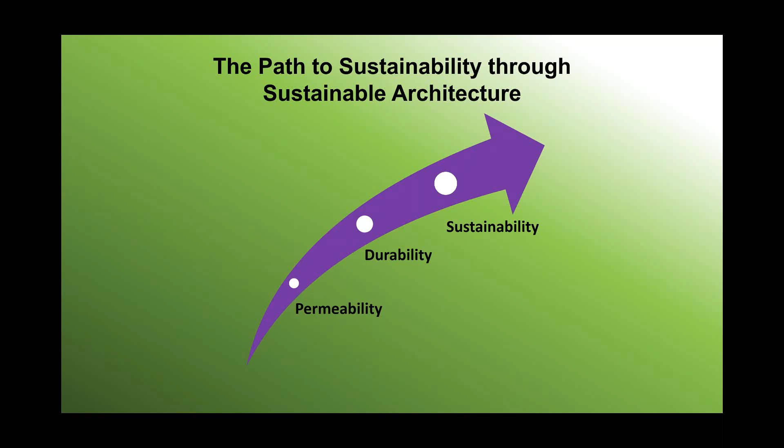...environmental importance and the resulting longevity of structures. So basically, when we increase the service life of any material, we somehow provide a solution for preserving the Earth's natural resources.

But as I mentioned earlier, durability affects all 3 pillars of sustainability, which are environmental, economic, and social. For environmental, durability can reduce the needs for additional materials, energy demands, and waste due to...

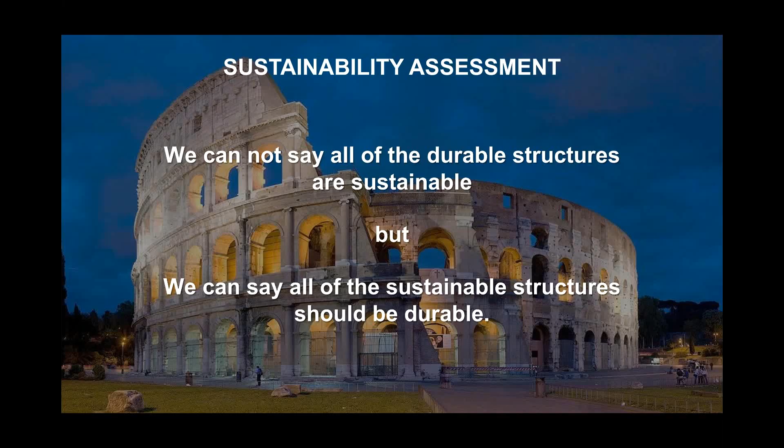So what is the definition of durability? A durable concrete is one that performs satisfactorily in a working environment during its anticipated exposure condition during service. Or in other words, when exposed to its intended service environment, such as a marine site, a durable concrete will retain or remain its original form, quality, and serviceability.

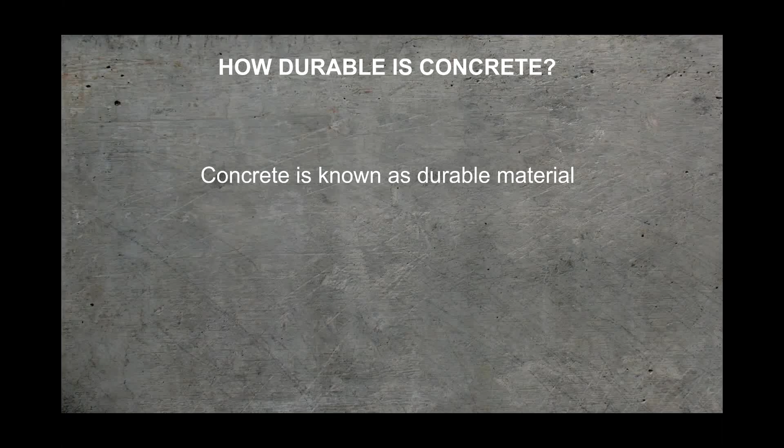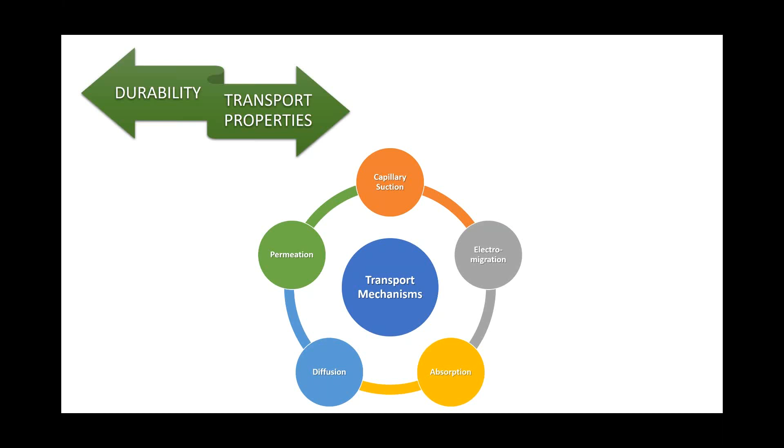So as I quote the definition of durability, the durability of concrete to a large extent is commonly accepted as related to and governed by its resistance to the penetration of aggressive ions such as chloride, through the 5 mechanisms which I mentioned: capillary suction, electromigration, absorption, diffusion, and permeation. These are all 5 transport mechanisms happening through the concrete structure.

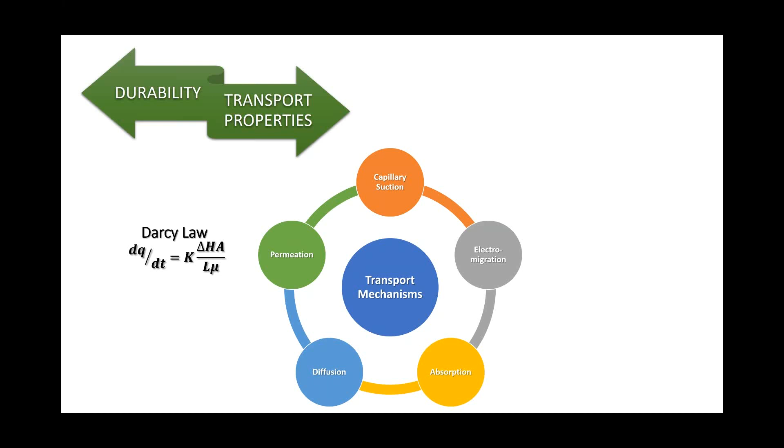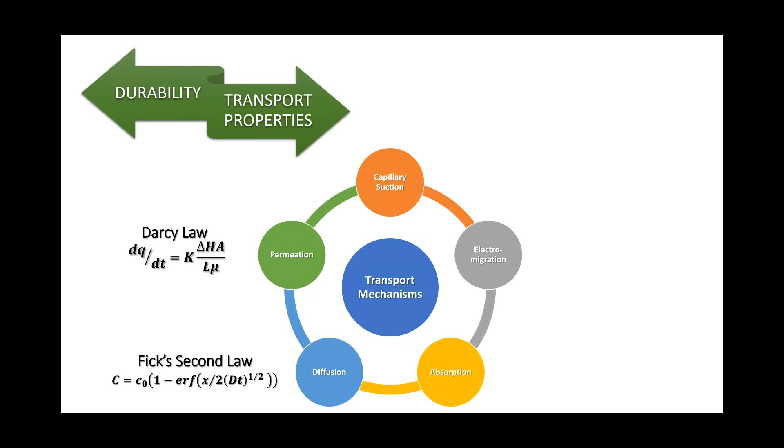So about electromigration, this may be derived from an external source, such as leakage from the direct current power supply, but it is also frequently caused by other factors such as the electrical potential of pitting corrosion of reinforcing steel. Electromigration usually can be measured from the electrical resistance of concrete, because it is the only mechanism by which concrete can conduct electricity.

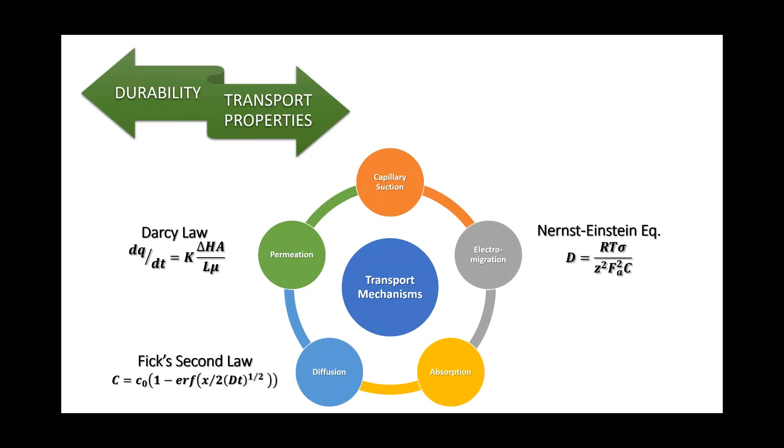We have capillary suction, which is the transport of liquids through a porous solid by way of surface tension acting in the capillary pores. A variety of physical or chemical mechanisms may govern this, depending on the substance flowing, its local concentration, the environmental conditions, or the porous structure of the concrete and the radius and presence of macro cracks.

But the key here, which most researchers and engineers propose, is permeability. It's well known that this is the concept directly related to durability.

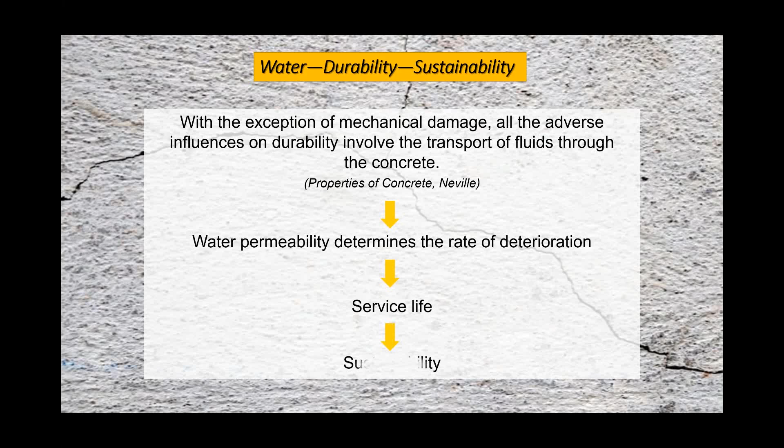So one item is water. As probably all of us know, water is the most harmful agent to any kind of structure, because with the exception of mechanical damage, all the adverse influences on durability involve the transport of fluids through the concrete by water. It can be through solution, or into the air, or other kinds of items. It also controls the rate of deterioration. And when we have a permeable concrete, the service life is going to decrease, and eventually we don't have sustainable structures.

So to clarify, porosity doesn't mean the same thing as permeability of concrete. We can have high porosity and also high permeable concrete. When we have a network of pores inside the concrete which are interconnected, that means we have high porosity and also high permeability, which is going to reduce our durability.

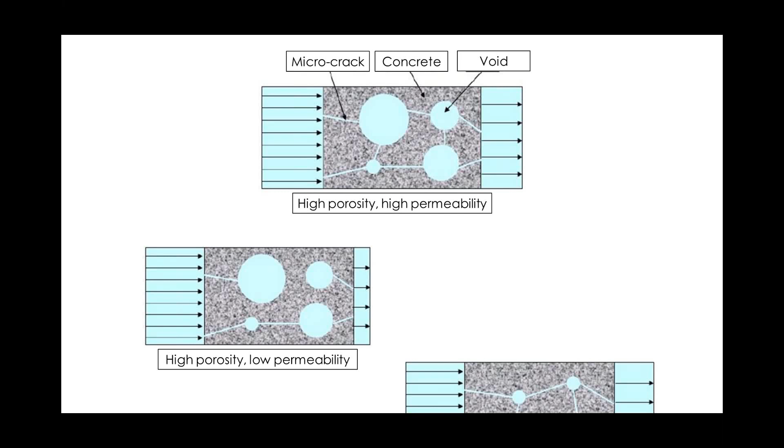As you can see in the photo, we have microcracks, we have voids inside the concrete, and all those voids are internally connected, which tells me this is high porous and high permeable. But in other words, if we have high porosity but these pores are not internally connected, we may have lower permeability, which is kind of an advantage as it's going to increase the durability of our material, concrete. Also, if we have low porosity and the pore size is small, it doesn't mean we don't have permeable concrete, because all these pores can still be connected to each other.

So, what factors affect transport and durability characteristics of concrete? I summarize it in a table such that, as you can see on the left, type and degree of compaction - all these factors can somehow affect the properties of the matrix, which is mostly the porosity, matrix chemistry, and pore fluid chemistry. And all of them are related to all of the transport processes that I mentioned earlier.

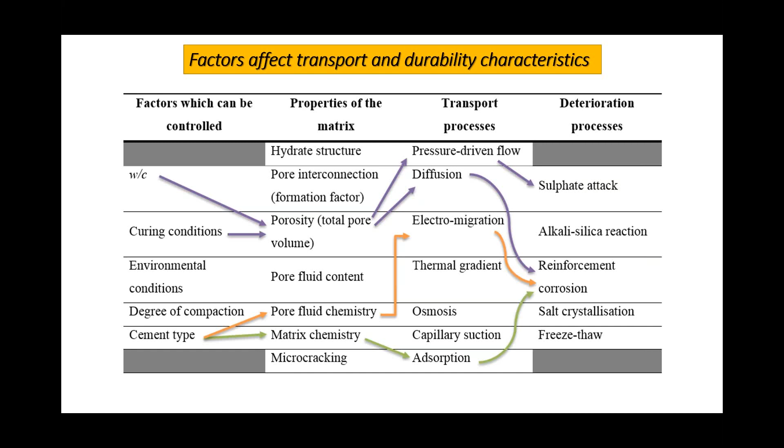So one of them is diffusion, one of them is permeation, the other one is electromigration, adsorption, and so on and so forth. But all of this can create a pathway inside the concrete, and this pathway may end up degrading our material. We also have some deterioration processes inside the concrete, which I mentioned: reinforcement corrosion, which is the major one, and also sulfate attack, alkali silica reaction, and freeze and thaw.

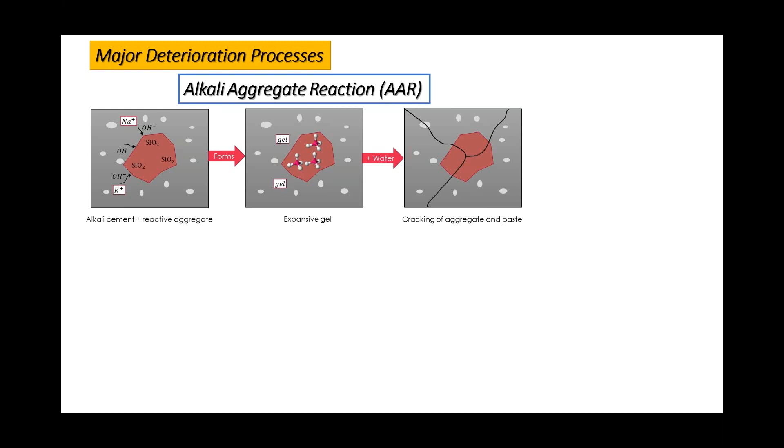But I'm going to quickly go and explain these major deterioration processes inside the concrete. First, I'll start with the alkali aggregate reaction. When aggregates containing certain forms of silica react with alkali hydroxide inside the concrete, they form a gel, and this gel swells as it absorbs water from the surrounding cement paste or the environment. These gels later on can induce enough expansive pressure on our concrete surface, which leads eventually to cracking inside the concrete, which is not a good item at all for durability.

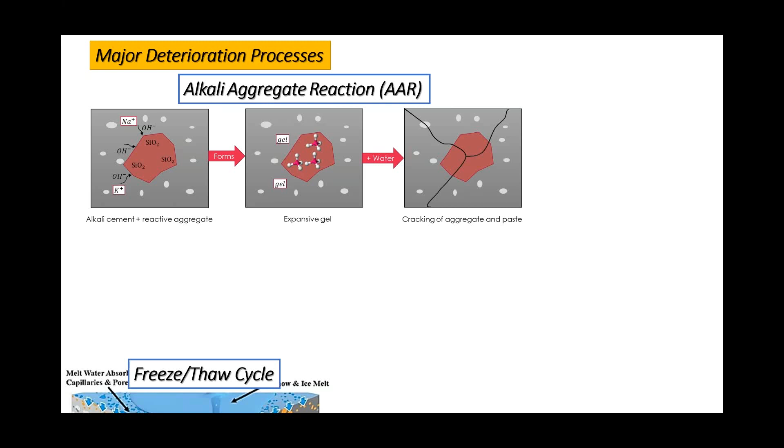Also, another deterioration process is called the freeze and thaw cycle. As we all probably know, freezing of water inside the pores is going to expand by 9% in volume, and that volume of water expansion may cause initial induced cracks inside the concrete. It affects both the hardened cement paste and the aggregate of concrete, and it degrades our material.

These phenomena occur due to the presence of calcium hydroxide in the hydrated Portland cement paste. When the cement paste comes in contact with sulfate ions, the alumina containing hydrates are converted to the high sulfate form, which, as you can see in the photo, is going to form ettringite, which is not a good item for concrete, because eventually the growth of this crystal is going to induce pressure on the concrete surface. These are not stable crystals either, so they may disappear, which is a special case of internal sulfate attack.

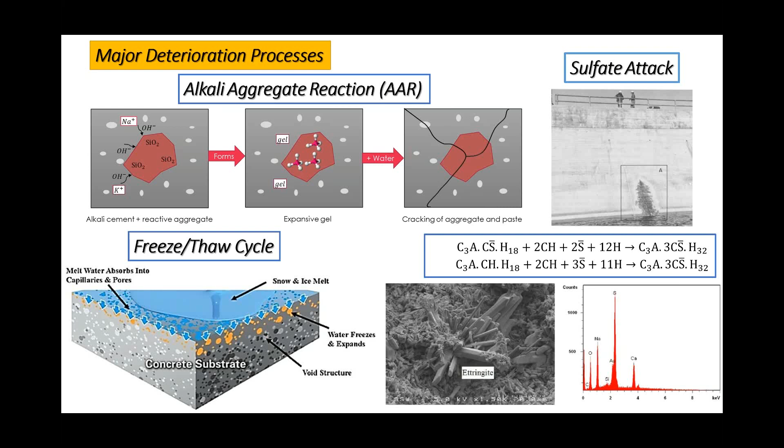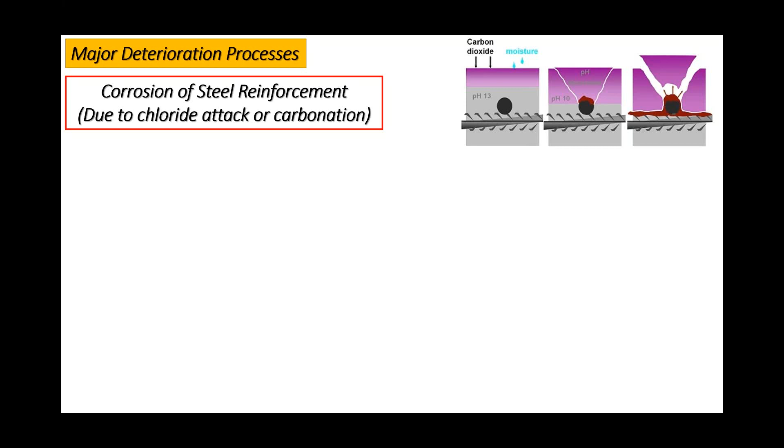But among all of these, based on statistics, it has been indicated that over 40% of failure of a structure is due to corrosion of reinforcement. This is the chemical process to form the corrosion cell, which may be generated in two ways. One way is the composition cell, which may be formed when two dissimilar metals are embedded in concrete, such as steel rebars or aluminum conduit pipes.

Also, in the vicinity of the reinforcing steel, concentration cells may be formed due to differences in the concentration of dissolved ions, such as alkalis or chlorides. So the corrosion is going to happen through chloride attack or carbonation.

When the level of carbon dioxide at the surface reaches the rebar, it's going to reduce the pH level of the concrete, and eventually induce stress onto the concrete surface, tensile strength, and eventually crack the concrete.

Similarly, when we have different oxidation states in the iron, the photo on the right hand side shows the volume expanding by 6 times, which again induces pressure on the concrete wall, and we may have cracks.

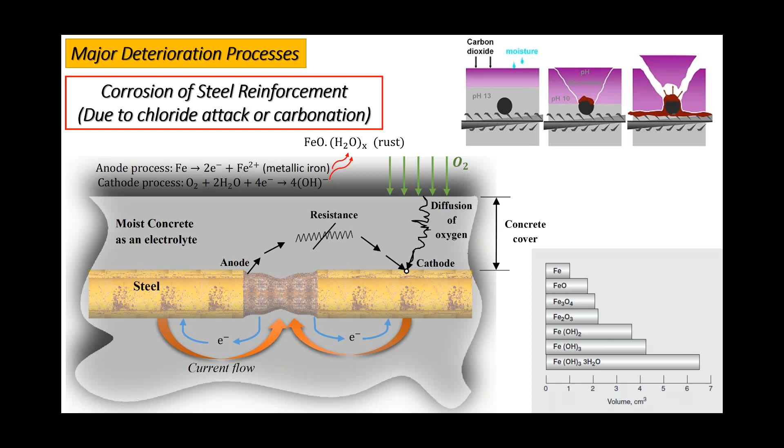Why am I mentioning cracks so many times? We have different types of cracks inside the concrete. Cracks can come before serviceability, or can also be induced after. The crack before happens at the earliest or fresh stage of the concrete, like shrinkage or settlement, or from construction processes such as chemical, physical, thermal, or structural processes.

The cost from this process is around 5 billion dollars. In addition, because of loss in production and traffic jams that occur, indirect costs are also associated with concrete crack repairs.

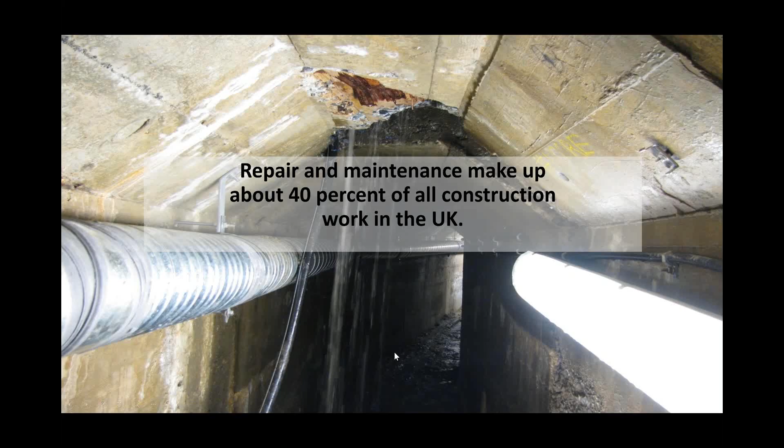Besides all of these repair costs for material, we should consider that sometimes it is not easy or accessible to simply go and repair some structures. As you can see in the photo for underground structures, this is a huge issue because the crack might not be accessible all the time.

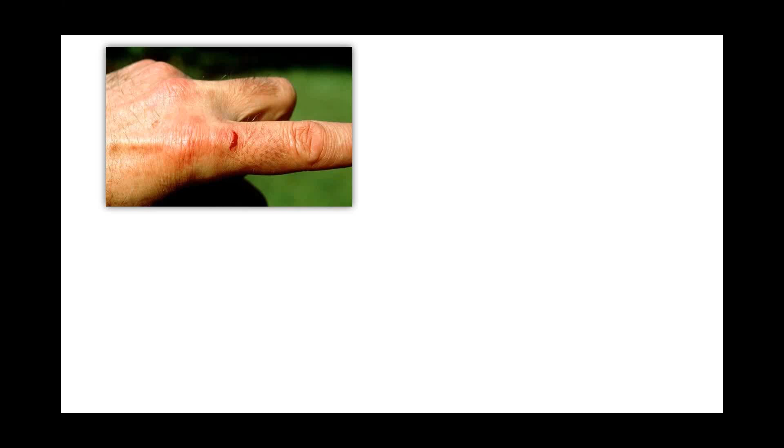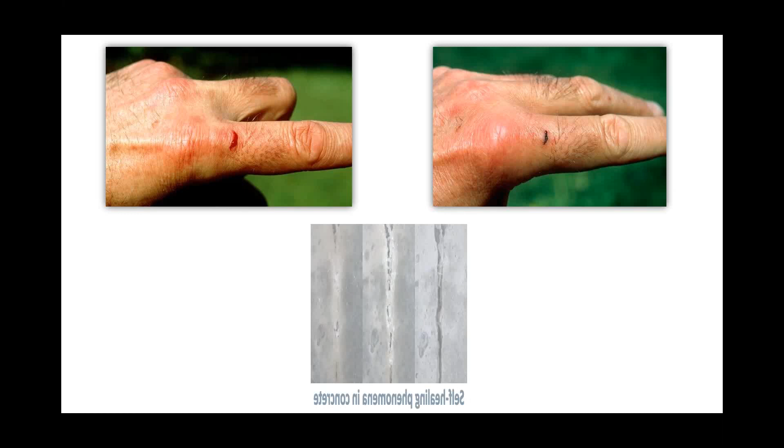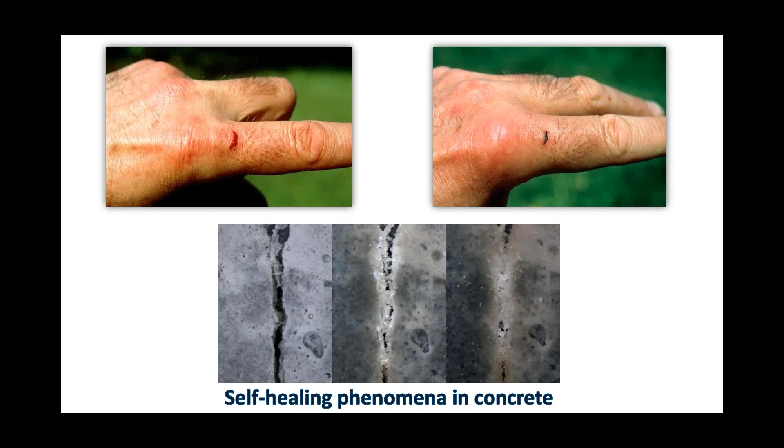But humans always learn from nature. For example, whenever you cut your finger, you can see it start bleeding, but as time passes, the cut in your finger heals—this is similar to what typically happens inside concrete.

But there is an issue—you can't rely on this natural phenomenon because sometimes it might not happen, or it's limited to certain crack widths less than 0.2 millimeters, which isn't much compared to other types of cracks I mentioned.

Recently, there has been great attention to self-healing mechanisms in concrete. It has been divided into two forms: autogenous healing, which I mentioned earlier, and the concept of engineered or autonomous healing, which has been divided into three different ways.

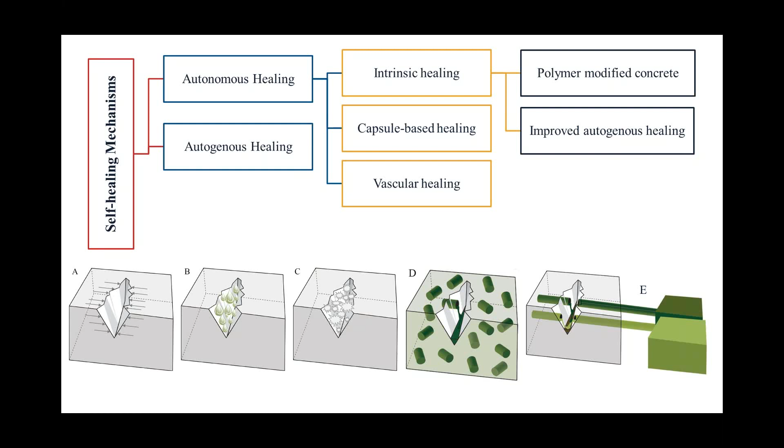But what I'm focusing on now as part of my research is strengthening the hydration products, or providing more crystals that act as a barrier inside the concrete, which helps the concrete improve.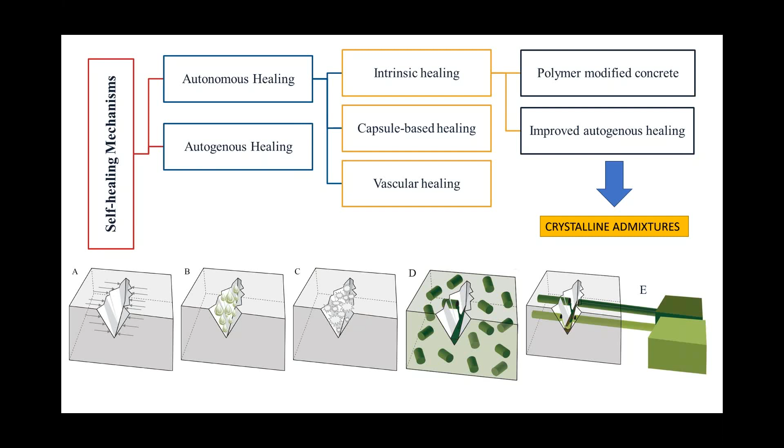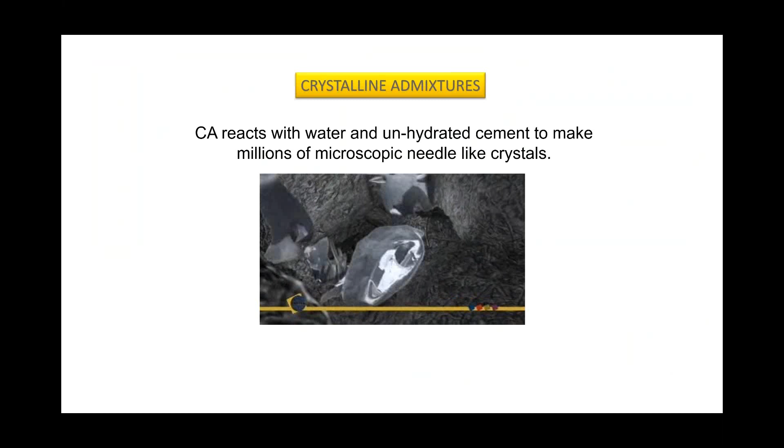So I'm working on a technology called crystalline admixtures. These crystallines are hydrophilic materials with a tendency to react with water and un-hydrated cement, making millions of microscopic needle-shaped crystals, as you can see in the animation.

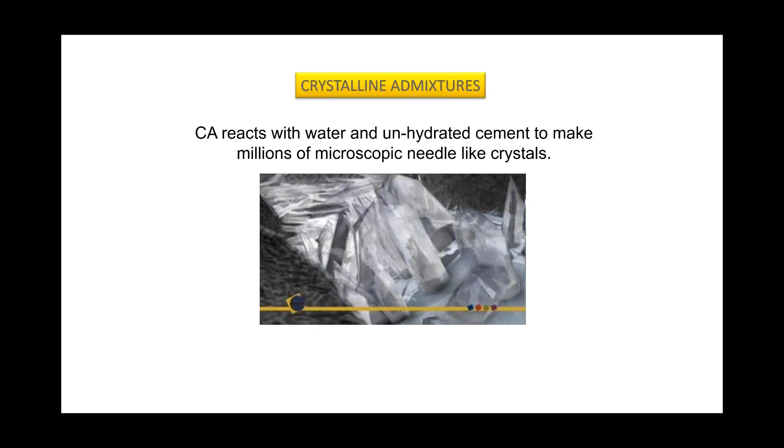This crystal is going to form inside the crack, block the water pathway, and seal the concrete from the outside. This admixture is typically added during construction.

As part of my research, I'm using these kinds of admixtures, but there are still many unknown questions. One is that I couldn't find a research study that evaluates the self-healing capabilities of this admixture using durability, macromechanical, microstructure, and nanostructure tests simultaneously.

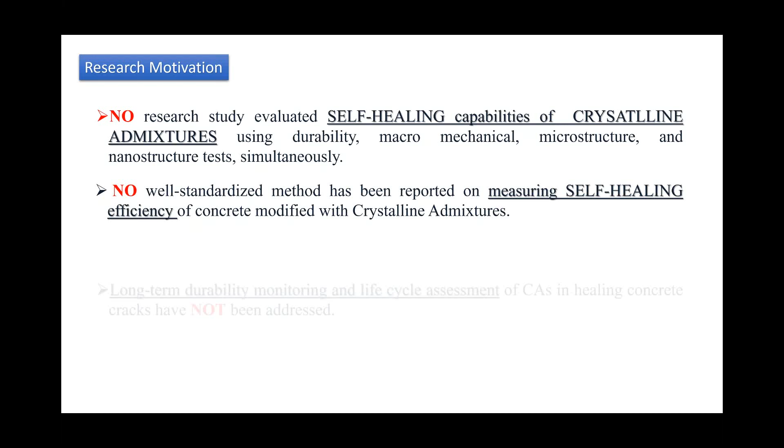Also, I couldn't find any well-standardized method reported on how we can measure the efficiency of concrete when modified with this crystalline admixture. Also, long-term durability monitoring and life cycle assessment of this admixture is somewhat lacking and hasn't been addressed so far.

Also, all the current construction design codes, guidelines, and standards consider concrete as a crack-free material, which is not true at all. Concrete may not be prone to cracking, but there's always cracking inside the concrete.

So we should consider in our guideline the crack phenomena inside the concrete.

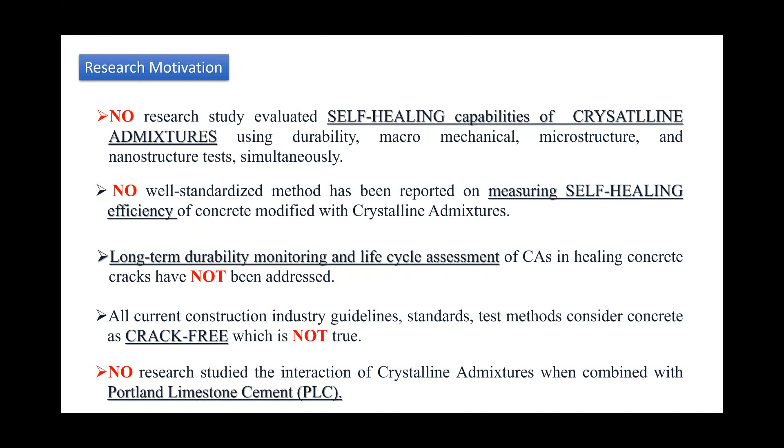No research study I found shows the interaction of crystalline admixture when it's combined with Portland limestone cement. This type of new cement has 15% more limestone, and it has less carbon dioxide footprint, which makes this structure more sustainable because of using less clinker inside.

So I divided my research study into 3 phases. First, I went through the microscopy and wanted to see how these crystalline admixtures perform in microstructures. I also wanted to quantify the reduction in porosity and eventually permeability, and identify the difference between different phases of hydration and chemical composition between samples treated with this admixture or without.

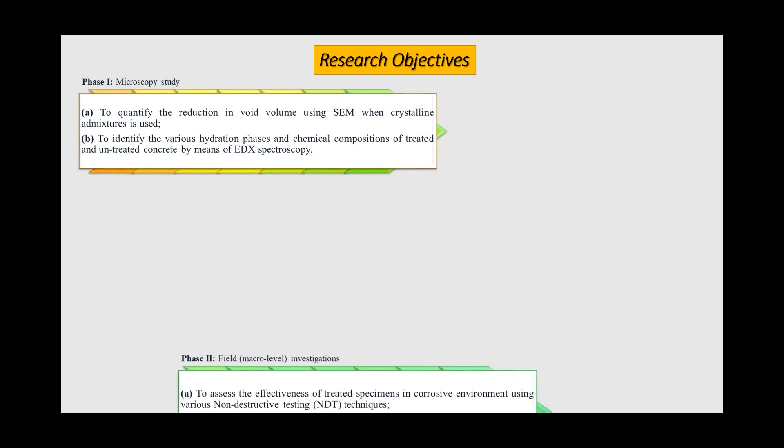I also have some field samples, which I call the macro level investigations, to see the effectiveness and durability of samples in a corrosive environment using various NDT techniques.

And also, I would like to develop a sustainable durability-based design model for my specimen.

At the end, I want to quantify the self-healing capability of this admixture to see its influence when interacting with the Portland limestone cement, and to see various types of environmental exposure and their effect on the self-healing process.

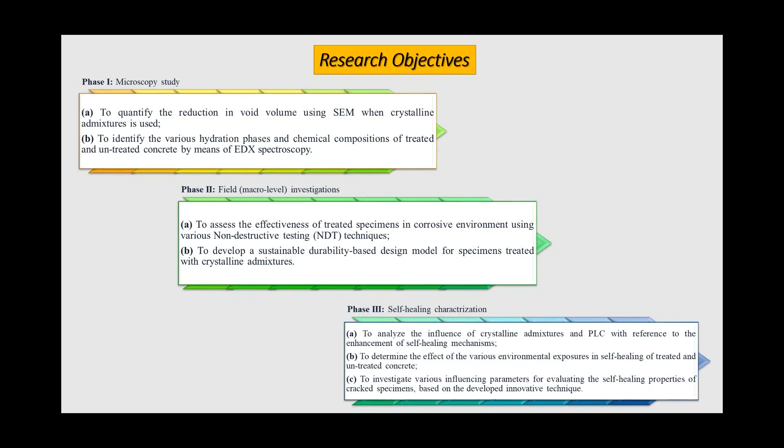So I'll start with phase 1 of my study, the microscopy. First, I used scanning electron microscopy to see the structure and morphology of my samples.

So I cast some mortar, broke them, and coated the fracture surface to see the difference between the control samples, which don't have an admixture. As you can see in the photo, there's a crack inside.

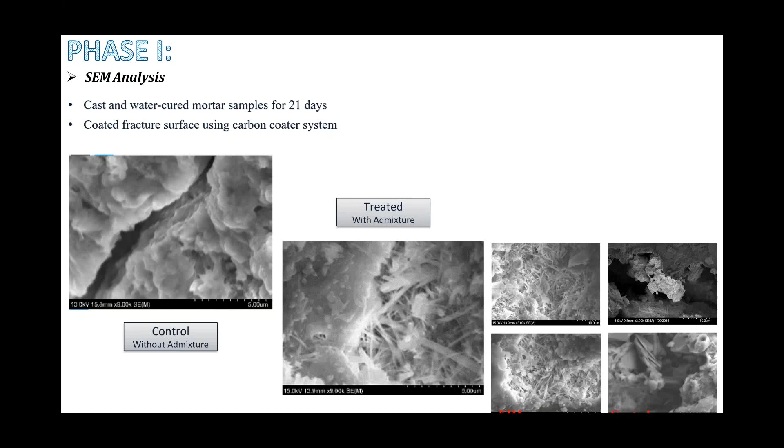I also cast samples where you can see the crystal growth inside the cracks, which gives us an indication that this admixture performs best in crack healing. Here I put some photos comparing the control samples without admixture and the ones with admixture. On the right-hand side you can see the crystal growth inside, and those crystals eventually act as a membrane that blocks the water pathway inside the concrete and makes the concrete heal better.

I went further because of one waterproofing admixture, or crystalline admixtures, so I extended the study to use 4 different types of these admixtures which are commercially available.

As you can see, the KIM product is from Kryton, the international company here in Vancouver, and also 2 different products from one company and another from Penetron. As an indication, all of them showed the growth of crystals inside.

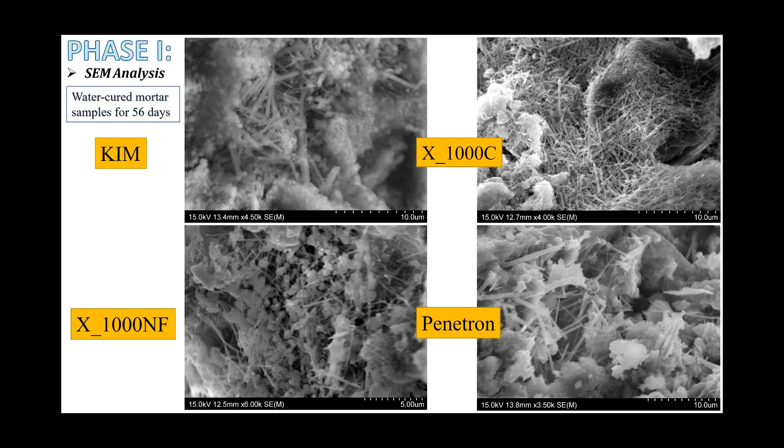In order to identify the difference, I did X-ray analysis on both the product produced by Kryton and the other products. As you can see, when I did the X-ray spectrum analysis, one critical component I needed to look into was whether these crystals were ettringite. As I mentioned earlier, ettringite is not a good thing for concrete.

This can be indicated by the presence of sulfur, and you can simply see here that there's no indication of sulfur and no sulfur peak, which means there's no sign of ettringite. On the side, you can see the elemental mapping for different elements inside the concrete.

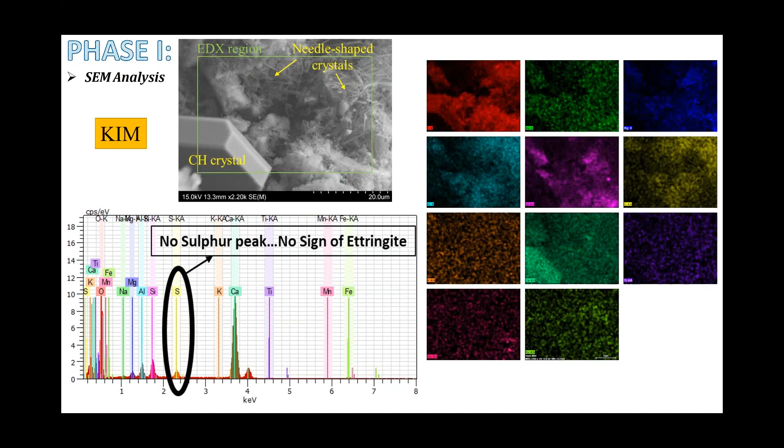Penetron is another product that I used in my research. This also showed crystal growth inside. So as you can see here, I tried to examine it using X-ray analysis, and it turned out differently, because this product seems to also induce ettringite, which, when compared with the other product, is not a good thing for the concrete.

So we need to be cautious whenever we are using this type of crystalline admixture. As you can see here, there's a peak for sulfur, which indicates ettringite inside.

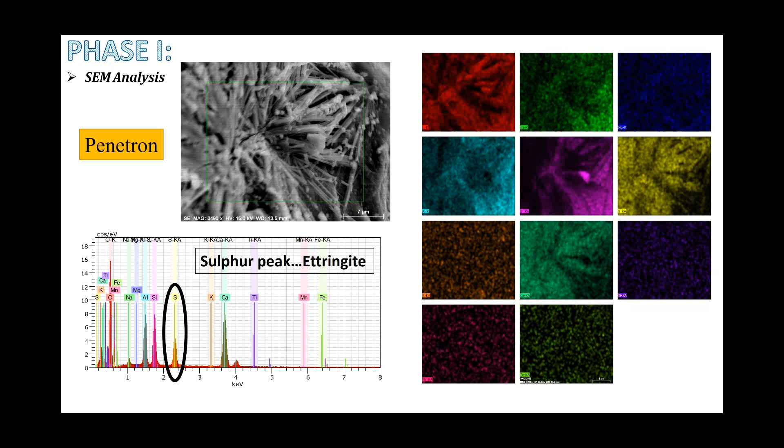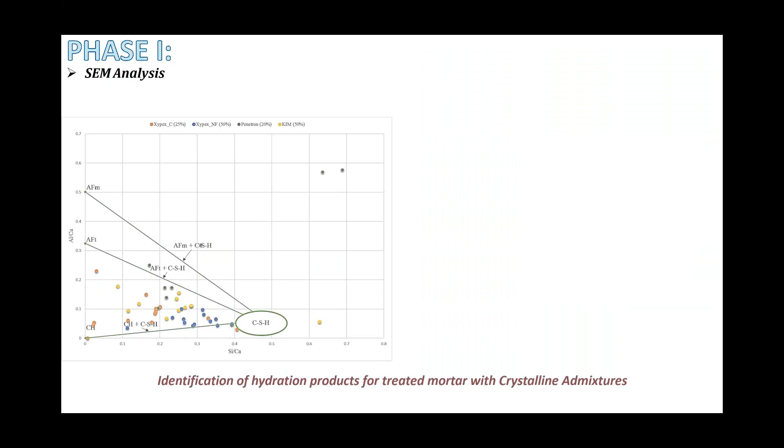And similarly, I plotted the elemental mapping for these products. Also, to find the hydration products, I plotted the aluminum to calcium ratio and also silicon to calcium atomic ratio to identify different hydration phases inside the material.

As you can tell here, it's kind of spread around, but still they are aligning in the line of calcium hydroxide and CSH gel, which is the main product

Also, in our advanced microscopy facility, we are proud of having the highest magnification scanning transmission electron holography microscope, which is one of the tools I used. Using this transmission electron microscopy, I was able to image the nanostructures of these admixtures. So I started with an anhydrous, or unhydrated, particle.

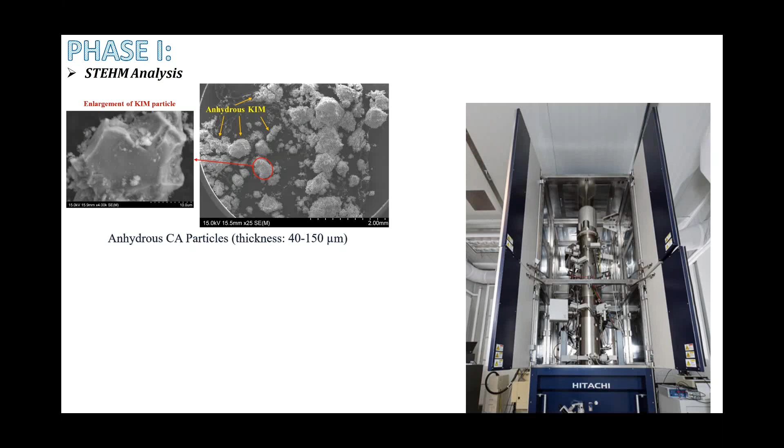I put it under the SEM. The size of this particle was 40 to 150 micrometers. Then I sprayed water on top of my samples, on the powder, and I kept doing that for 7 days. As you can realize, the formation of needle-shaped crystals on the right-hand side of the SEM image is obvious, and all the particles are somehow swelling, with hydration going on inside those particles.

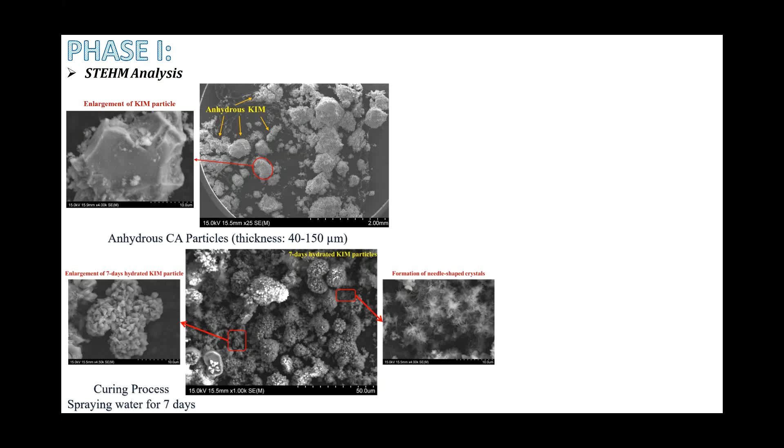But still, as I mentioned earlier, there is an issue when you want to see internal structures of your particles. The sample size that can be fitted inside the TEM should be less than 100 nanometers. To satisfy that purpose, I used the focused ion beam, which is a micro milling machine, and I cut the sample, one particle, to create an electron-transparent sample, as you can see in the photo.

So this is the view from our STEM, and you can simply see the particle has been cut to the degree that we can see through it, electron-transparent. Then I start analyzing that nanoparticle using different techniques. I call it STEHM analysis.

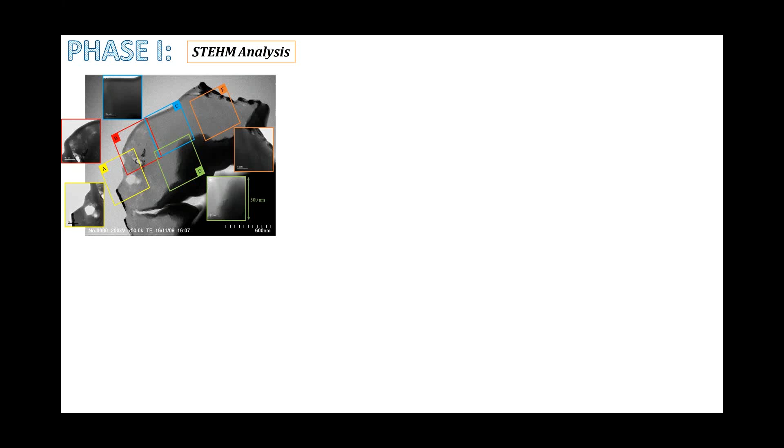First of all, I divided the sample into 5 regions, indicated by the letters A, B, C, D, E, and I imaged each of them. As you can see from the scale, this is almost a nano-sized particle from the crystalline admixture, and all of them show a compact, homogeneous morphology.

Also, I examined the morphology of my sample using the electron diffraction pattern. From this pattern, you can tell if you have a crystalline structure, an amorphous structure, or something in between.

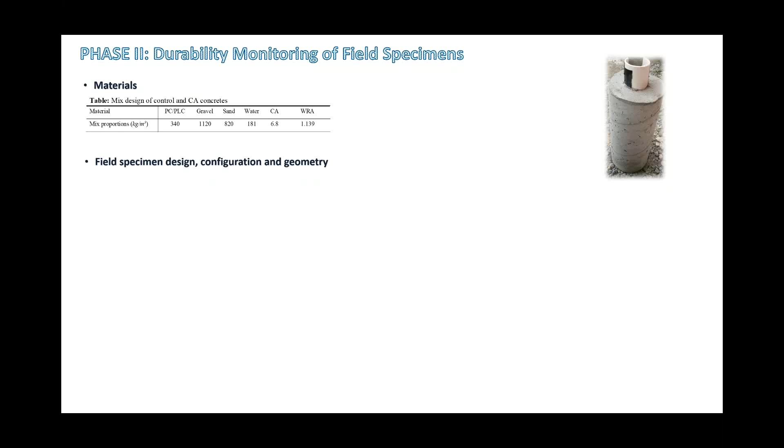This is the first part of my study. Phase 2 is durability monitoring of field specimens. For this purpose, I had the mix design for samples with the crystalline admixture and without. I used 4 different types of mixtures with 2 different types of cement, and you can see my mix design on the left-hand side.

I started by doing it as a trial mix, because I wanted to design a column that has a unique structure and can hold the salt solution inside. Part of my study was to see how this admixture performs in corrosive environments, and I wanted to simulate marine sites within my samples. So I started with a small sample size.

I used the PVC pipe, I used the sonotube, I used other types of material to see how I could get the hollow sections. Then when I cast bigger samples, our goal was to have the column with 4 feet height. Then I realized that all of the rebars should be somehow concentric.

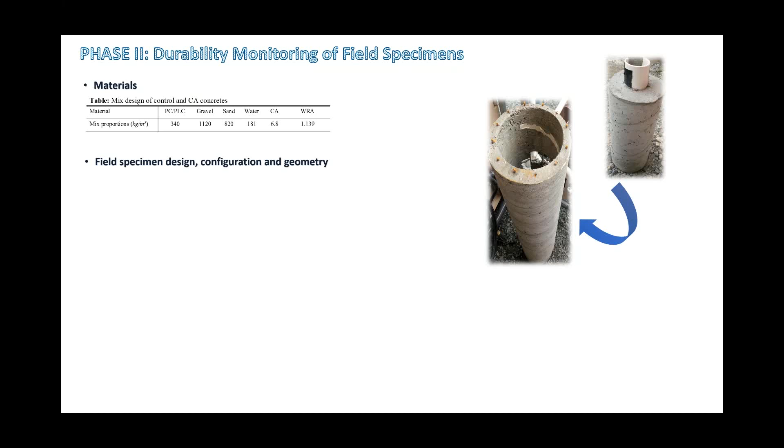So I went further and designed a model in SolidWorks, and as you can see, I managed to get a mold which can satisfy all these requirements. Using this mold, which has been manufactured here...

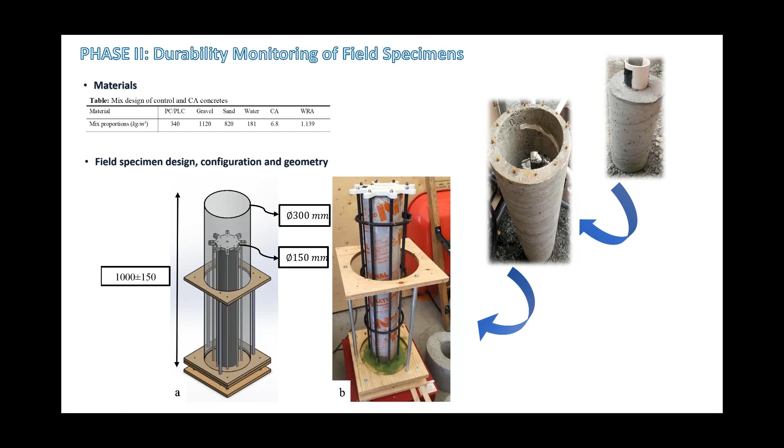I was able to cast 25 samples. Out of these 25 columns with a 4 feet height, also having a 12-inch outer diameter and 6-inch inner diameter, I got 18 of them which had different cover thickness of the rebar and different exposure. Some of them are exposed to the salt solution and some are not, and also some of them I was able to put the admixtures inside the mixture.

I've been curing them for 14 days, and then I exposed them to the natural environment outside our civil material facility. I started monitoring these samples since 2015, and since 2016 using several different non-destructive techniques.

One of them is my main focus, which is electrical resistivity. As I mentioned earlier, it has a direct relationship to concrete durability, and there are some non-destructive methods that you can use.

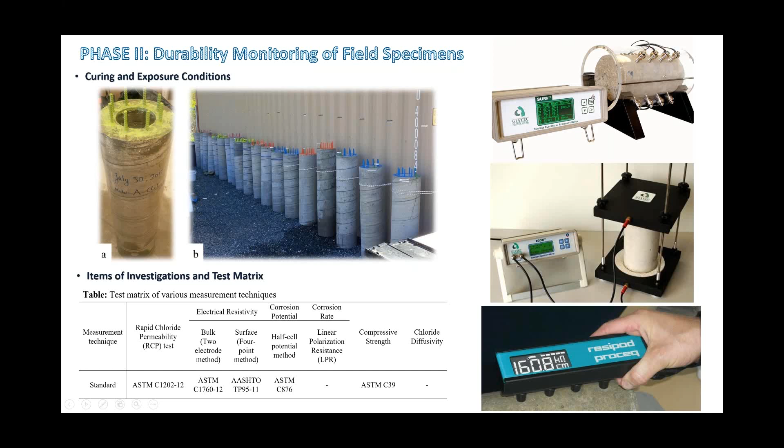One of almost 3 items I realized is the effect of age. The samples with higher values in the chart are the ones I cast earlier, which are older than the others. I also realized that the one with admixture has higher electrical resistivity, and some of these samples, based on cover thickness, showed that cover thickness also plays an important role—the ones with thicker cover thickness showed higher resistivity.

Then I would like to move on to the third phase of my study, which is self-healing characterizations.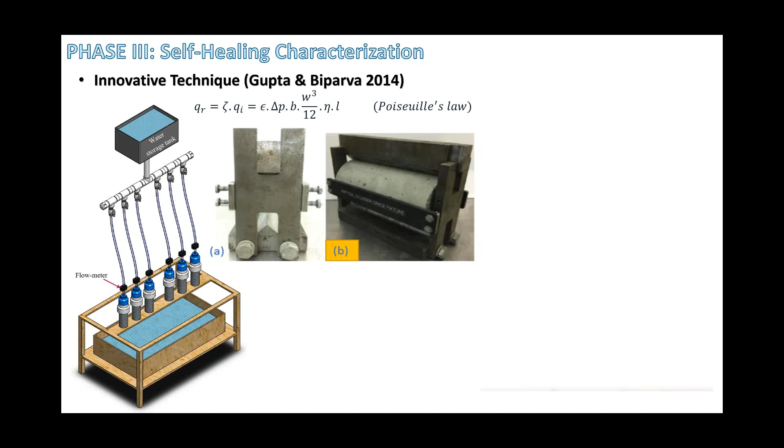This is the setup for the test. We have the water storage on top, and the water comes through the 6 pipes, with a head of almost 1.5 to 1.6 meters. We installed 6 flow meters from Omega, connected to the computer, and using LabVIEW software we measure the flow rate live. During that time, we can tell how much our concrete cylinder is sealed or healed.

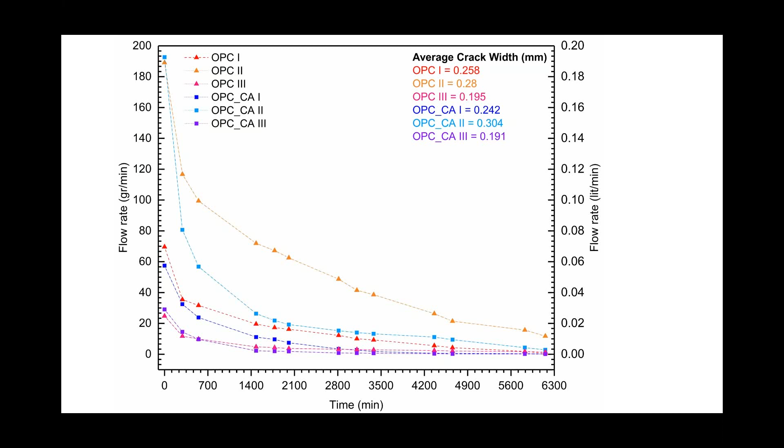I tried similar tests on samples with Portland limestone cement, with and without admixtures, and I realized the same phenomena happening. The yellow, light blue, and green lines in this graph are the ones with Portland limestone cement and admixtures, and you can see they drop more than the others, which is a good indication that the self-sealing process is happening inside our samples.

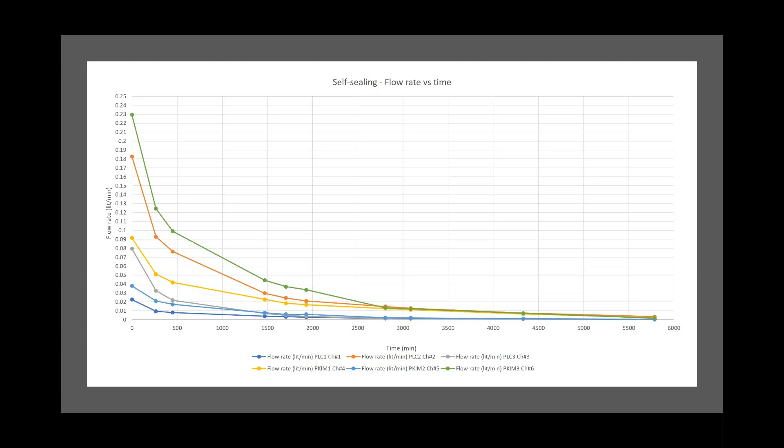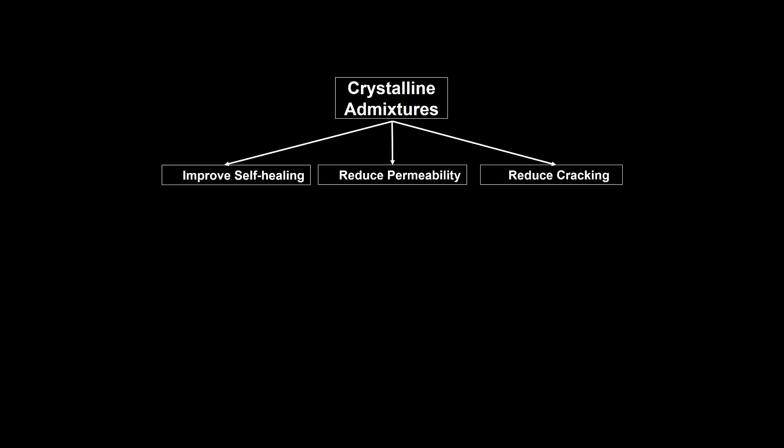So to conclude, I used crystalline admixtures to improve the self-healing phenomena inside the concrete, reducing permeability, and eventually reducing the cracking size and amount, which is critical for the repair process because it's costly. In some way, I enhanced and improved the durability of concrete structures, leading to longer service life and less repair cost. We believe this will make concrete more sustainable.

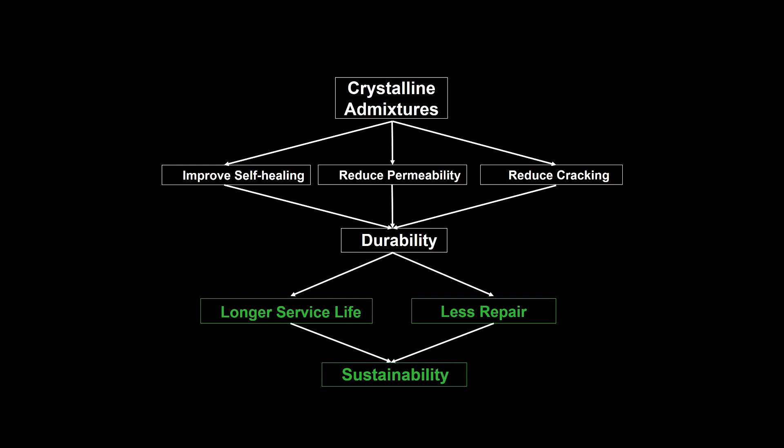So this is the triangle that I really like: sustainability, durability, and permeability, they are all related to each other. One day, hopefully, we'll see all concrete structures durable enough to have a sustainable world.

As a future work, I quickly mentioned that for the microscopy phase, I decide to have the SEM images, and I want to filter those images to just isolate it to see the pores inside. And then I would like to scatter all these images using percolation theory to construct 3D digital samples.

And also for the field samples, for the columns, I'm trying to develop a model which I call DuraCrack, because this model is going to be helpful for modeling concrete that has cracks, and also it includes the self-healing process in the crack. When you have self-healing inside, there's no need for consideration of larger crack widths, because you can account for that natural phenomena and also the one we are engineering inside, to have less amount and effort for the repair of those materials.

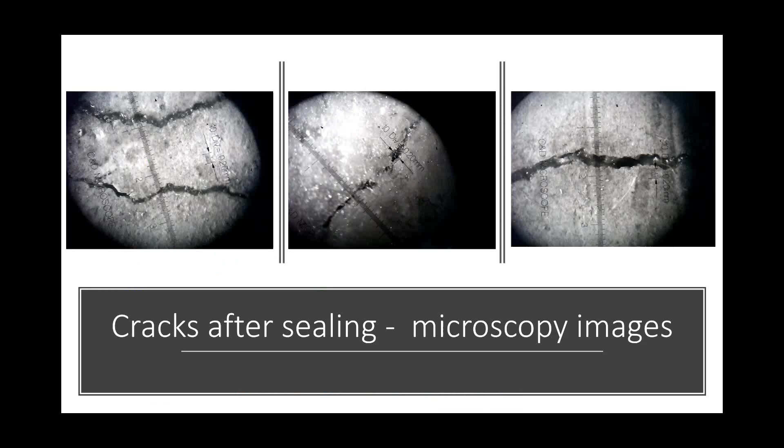Oh, I didn't try that, because I usually put the admixture inside my mixtures, and that was one idea we wanted to do — we induce the crack and just put that crystal admixture inside to see the crystal growth. But when I looked at the fracture surface of those admixtures, I was able to capture good images to see the crystal growth inside. For the nanoparticle, for the manufacturing process, I just picked the samples very randomly from those hydrated particles that I showed earlier. Let me go back to those photos. So here, before being hydrated, I just randomly picked the particles — I didn't try to just do it on the crystals. Eventually I went through the cutting process and then took the photo kind of randomly from one side of the particle. So I'm not sure if I answered your question.

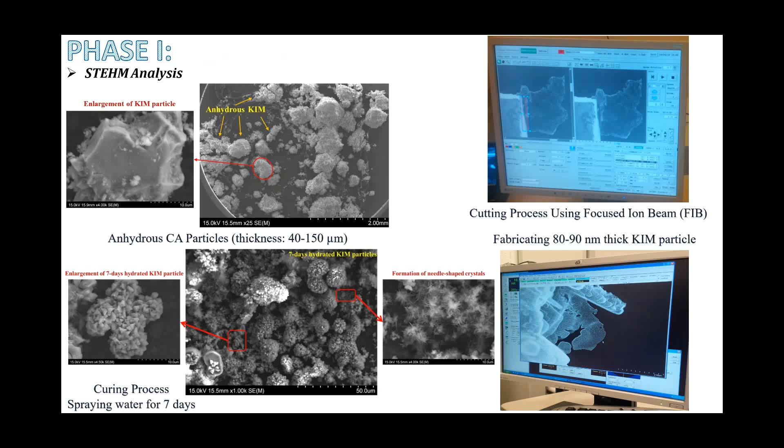I hope he got an answer on that. I'm trying to get into his idea — probably Pejman, what he wanted to suggest with the indentation test is that if you remember, when you do indentation on a surface, you have a clear understanding of whether the material is harder, whether the surface hardness could be stronger than before. So probably trying to attempt some kind of direct mechanical parameter, comparing the paste of cement to the crystals that grow inside of the crack — was he talking about a nanoscale size or a micro level? I think this is a micro level.

Okay, no, I haven't tried that one, because I was only interested to see the morphology of our sample and also whether it has an amorphous or crystalline structure. So I haven't done any mechanical test or understanding of the strain or stress inside the microstructure. I haven't done that one, but this is a good idea if I consider it later.

Okay, yes, this professor is very, very intelligent. Well, now the final question I have, Pejman, is the following: what do you think would be the reaction of all those crystals if, instead of pure water, you put this with wastewater that can have some type of chemical attack or a very harsh chemical environment — and when it gets in contact with the crack on the surface, what do you think would be the expected behavior of these crystallites?